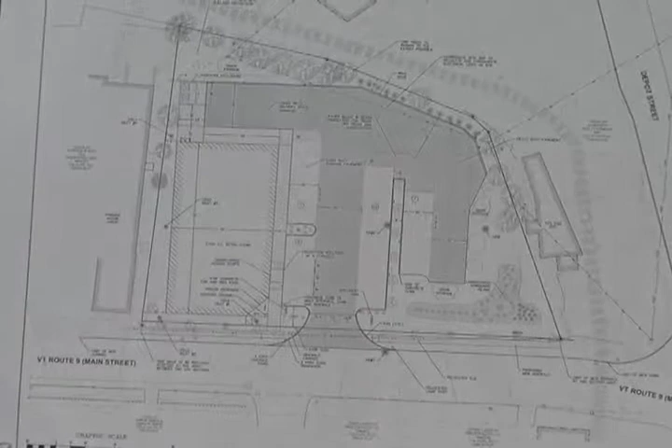Okay, I'll start with the site plan. That'll probably be the easiest to go over. What we're looking at doing is constructing the retail store on the west side, west portion of the parcel. The parcel is shown on the plans of the outline, kind of an odd square shape.

The drive that we're going to be proposing is just about opposite of the drive across on the south side of Main Street, and it would be shifting the existing drive that's there now up to the west a little bit.

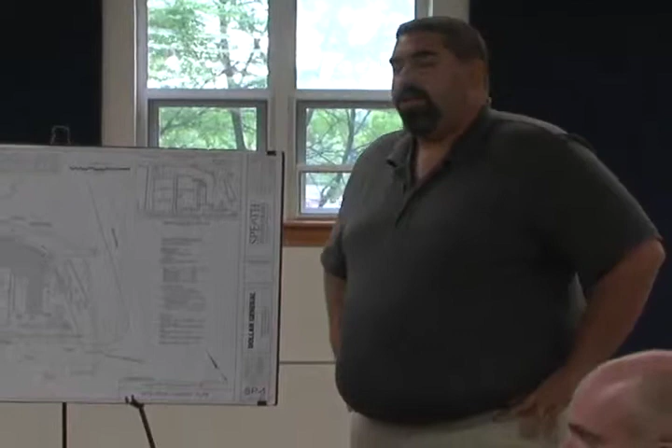The store would be 9,100 square feet, requiring 31 parking spaces by the town zoning code. So you can see we have those required spaces for the project here. It is a center drive aisle for parking on both sides, and then we have a swing around and extra parking spaces on the back side here.

The reason this layout is done is more for Dollar General's traffic circulation plan for their loading and unloading of their trucks. Their trucks would turn into the entrance, come around, and then back up to their loading zone, which is located behind the building. This way, if a truck is loading, it's out of the way of all the rest of the circulating traffic.

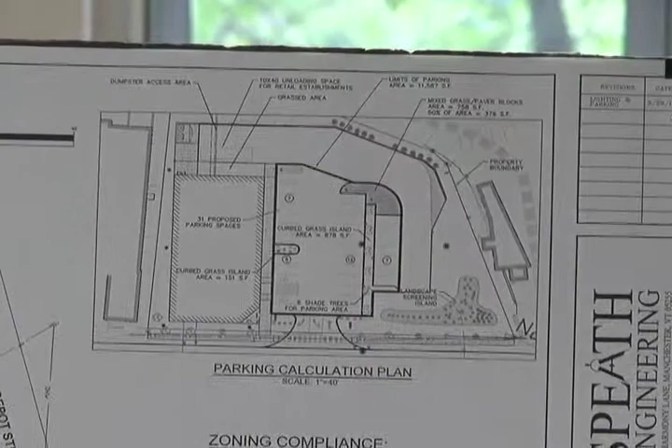As well as part of the circulation, we have provided, besides the spaces, all the necessary landscaping trees and green space within the parking area, which is shown on this calculation on the top corner. All the calculations are shown there and then below in the charts, showing that we meet the green space and parking spaces, and the amount of shade trees to be planted.

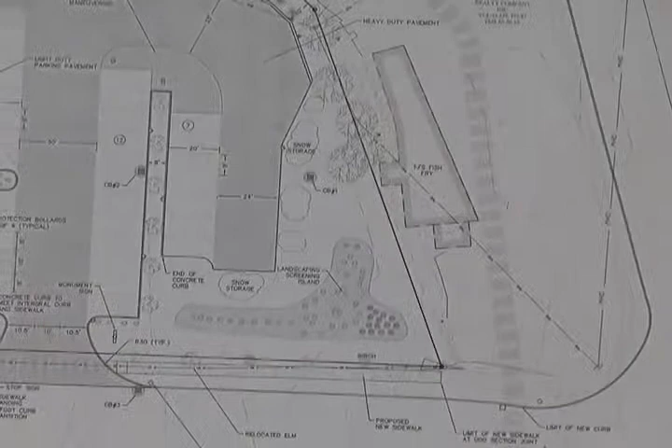As you probably know from seeing the site over the years, there's a line of hedgerow trees along the property line from the existing retail establishment where Family Dollar and the DMV are now. We will have to grade into some of that bank, and since those trees are tall deciduous trees, we're going to remove a few of them and then put in a row of evergreens to help screen the parking and meet that 42-inch parking screen that we need to meet.

In the front area, instead of just putting landscaping shrubs right up against the parking area, we want to leave some room for snow storage as shown here, and plant approximately a 2-foot high, nice landscaping berm with a lot of plantings on it to help screen the parking lot. So it would be an earthen and vegetative screen for the parking.

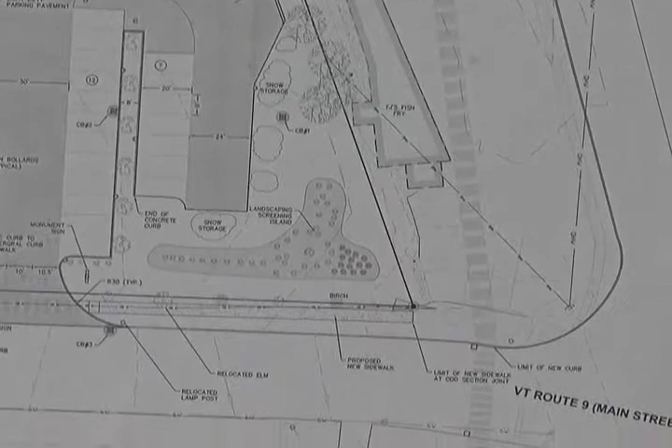The building itself is planned to be the 2-story as required. It would be a faux second story, but it would have the parapets and all the cornice details, which was approved by the historic review. What we're planning on is a brick panelized system, with windows that would actually be faux windows, spandrel glass, dark shaded, so there's no reflection on it.

We also have some other details such as the awnings over there. The front would again have some additional street trees. As you know, from that site now there are some street trees, maples and elms located on the street along with a light pole.

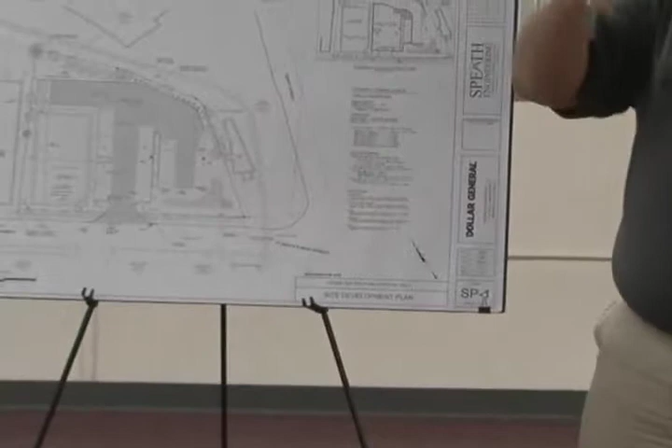One of the light poles is actually a little too close to the entrance we're proposing, so we're planning on relocating that pole approximately 9 feet. After talking with R.J. Jolly about it, he wanted to keep that light pole as close to the entrance as possible to keep the spacing on the street the same, so he's okay with this location.

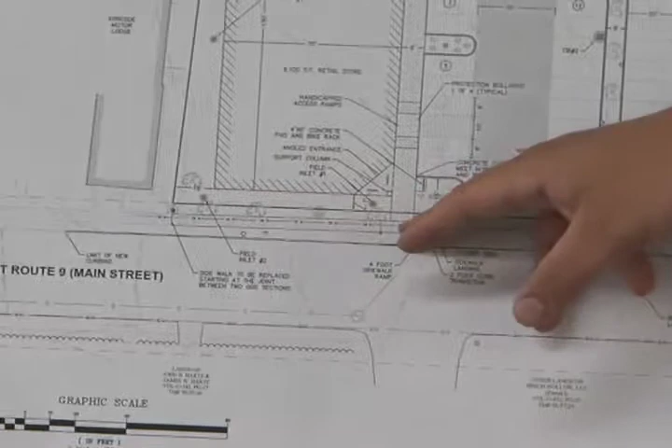We'd also be moving one of the street trees back in front of the building, and planting a few additional trees to make sure we meet the spacing requirements and that everything has a nice, evenly spaced feel about it.

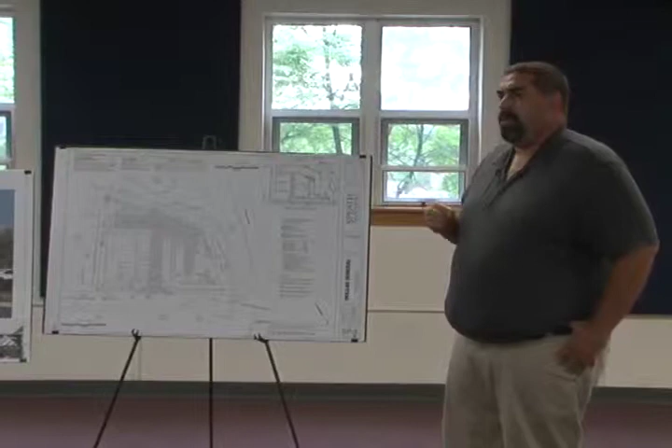On a drainage note, there's a few downspouts and some runoff coming, since we're going to be adjacent to the Kirkside Motel on the back side. You can see there's some lines sticking out, those are actually leaders coming down from the roofs. What we're planning on doing is collecting it.

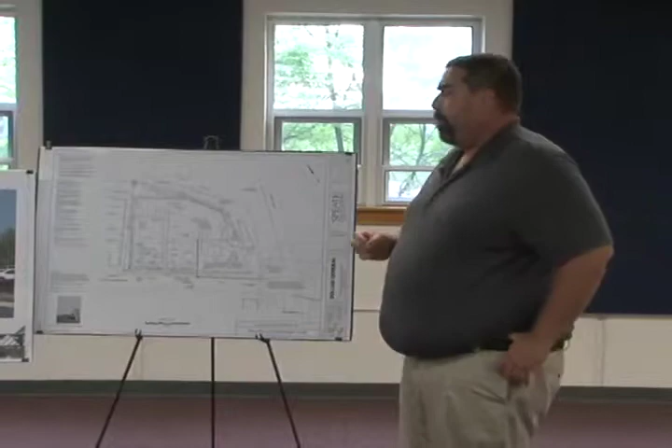One of the other plans you have is a grading and drainage plan, SP2. That shows we plan on putting some drainage inlets. Those are Nyloplast structures with a metal rim, somewhat of a catch basin, that would drain water that collects on the surface. We'd have it graded down so they'd be at low spots, and the roof drainage from our building would also drain into that system.

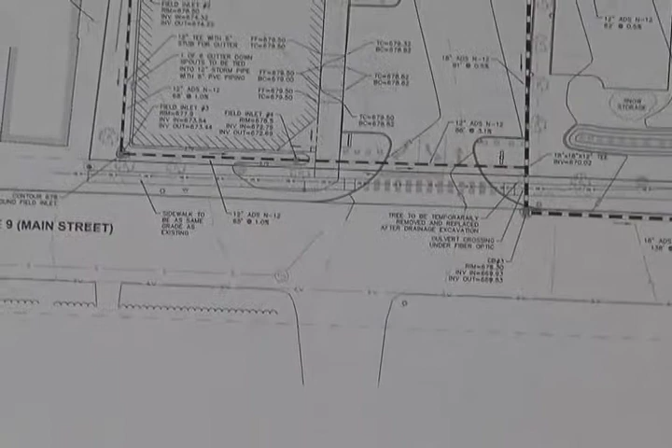We plan on collecting it, bringing it out towards the road across the front of the building, with catch basins in our parking lot and snow storage areas, bringing it out to a new catch basin on Route 9, or Main Street, excuse me. Then we plan on connecting that catch basin down to the existing catch basin located in front of the Sunnyside Diner.

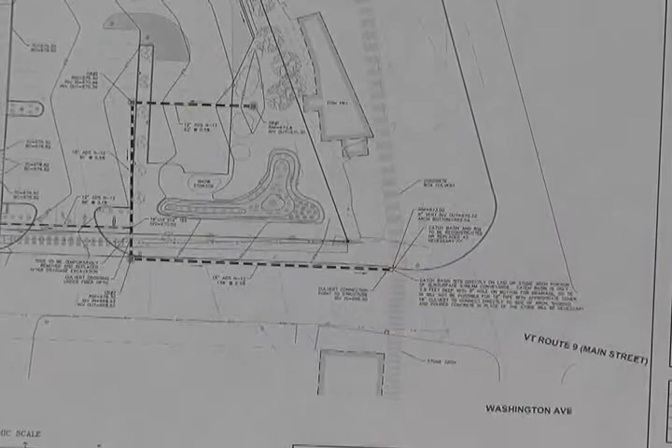One issue we'll deal with during construction is that this catch basin is only about 18 inches tall and sits directly on top of a hand-laid stone arch that still goes underneath Main Street here.

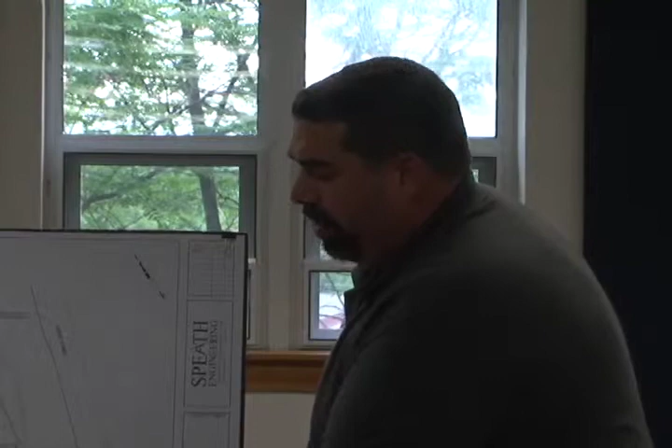There's a concrete headwall behind the Sunnyside, comes over, then there's a hand-laid stone arch here, and it goes onto this property where the fish fry is, that's now a box culvert going up and around out to the river. So we'll be cutting part of the road up and shoring up a new connection directly into the stone arch, leaving the catch basin alone. We'll be going into the side of the arch with a new concrete poured wall to shore it back up.

That's something we'll work out with RJ if we get approved and move towards construction, but he's preliminarily approved our connection to the drainage system. What he did request, since we're digging along the curb, was that we replace the curb along Main Street.

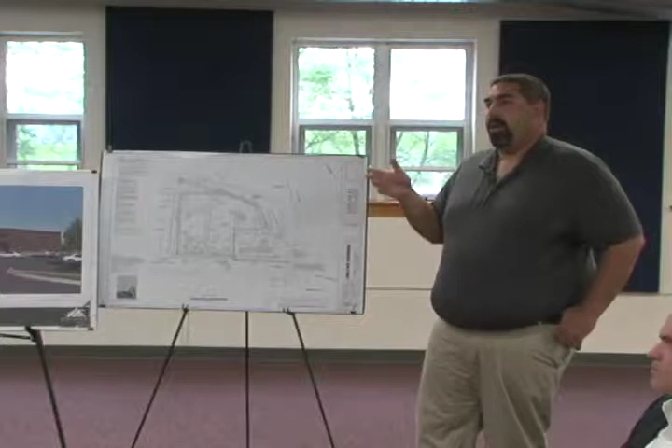What we're showing here is from about that catch basin, at a point either where there's an expansion joint or where the two curbs don't match, which is pretty much right next to the catch basin, we plan to replace the curb all the way up to where it meets the property line and just past it, to where the Kirkside Motel driveway is. Instead of stopping 20 feet short, we're going to go the whole way.

We also plan to dig up and replace the sidewalk, since we're going to be moving parts of it anyway, and replace the whole front part of the sidewalk in front of the property. This works well because when you walk on the property, there are odd sections of sidewalk in that area anyway, so we'll be taking out some of the older stuff and matching it up.

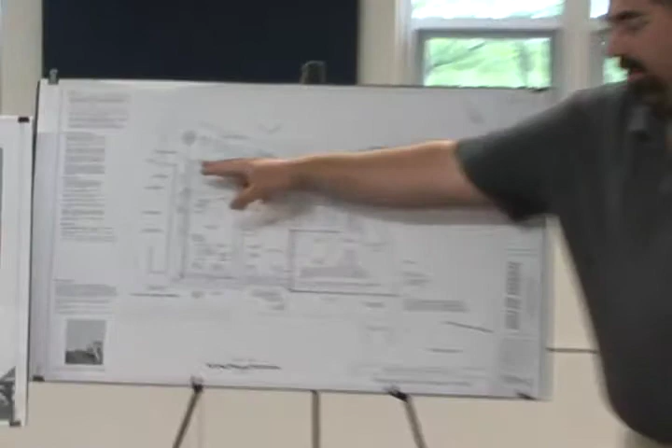Otherwise, for drainage, we'd be collecting everything on our site and bringing it to the town system, which is the box culvert that goes underneath. The grading is shown goes to all the catch basins. And on this side where it's fanning back towards the end, we'll have a wing edge on the end of the pavement, with a detail on the detail pages, that'll bring it around into this catch basin. The catch basin is sized with 18-inch pipes, which is adequate for the storms as necessary.

This project has less than 1 acre of impervious area, so it does not require a stormwater permit from the state of Vermont. So we are doing treatment and good engineering practices to manage the stormwater, so it doesn't go off to the neighboring site like it would today.

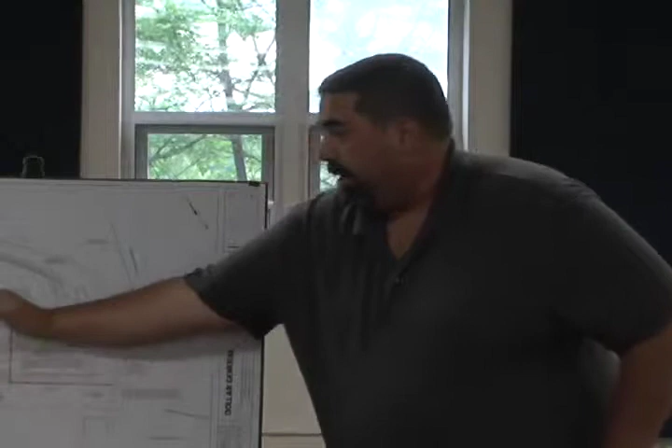Heavy storms now would actually just fan itself across the parking lot into the vegetated areas, and then down into the parking lot where Aubuchon used to be, now Family Dollar, creating more problems for them. We'll be collecting it and bringing it right to the town system, which drains to the river.

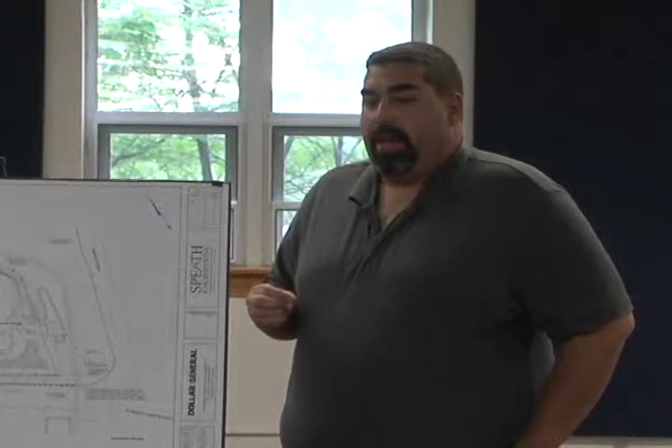We've also supplied utility plans and a landscaping plan, with foot candles analysis for the lighting plan. We've gone through multiple iterations of the lighting plan. I could put it up, but you're better off looking at it in your packages. We plan on using LED lights, multiple poles, to keep the foot candles down to meet the town standards, and also the state of Vermont standards for municipalities for dark skies.

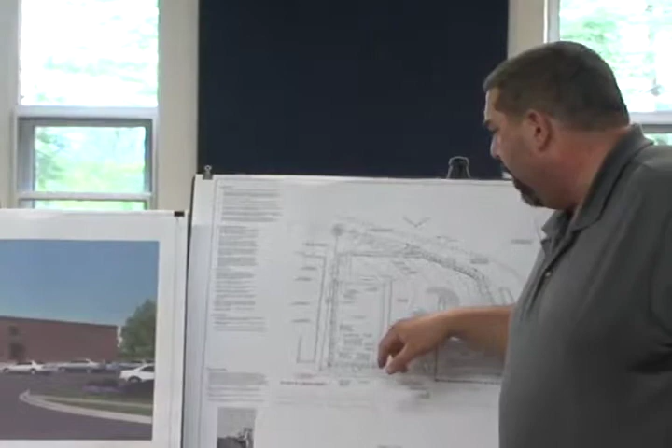We had originally designed the project to have wall packs attached to the building, but obviously you don't want to light the building up to meet town standards. So those have been removed, and now there are poles located in a couple of parking spaces and some hatched areas.

The building itself, if you don't mind, I'm going to pass these around, will start on both sides. It's brick panelized, and then this is the stone base. The stone base would be the lighter stone at the bottom of the picture, and the brick would be the rest of the building.

As requested through the historic review of the downtown district, the columns for the breaking of the building would be proud, sticking out from the building as shown in the illustration. Different architectural features were brought in to try to mimic some of the other downtown buildings, like the one near Friendly's or the theater building. There are definitely some details put in to try to match that above and below the windows, and the awnings.

The building would be supplied by propane. You can see it shown on the utility plan, SB3, but also on the grading plan. We're going to have buried propane tanks in this back area, with a slope going down to a flat area where they'd be able to have a couple of 500-gallon propane tanks buried, and bring the line in to the condensers and everything for the building.

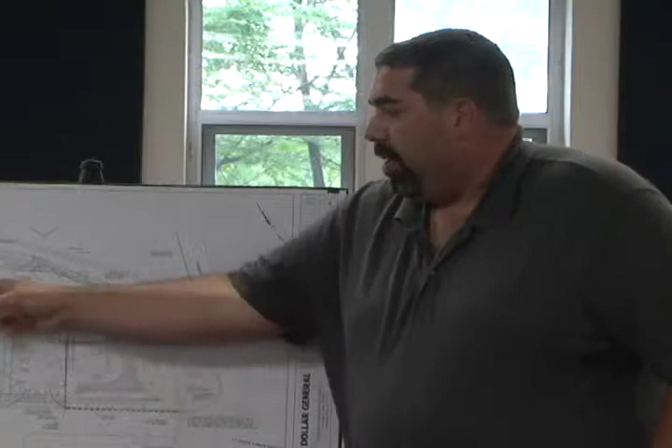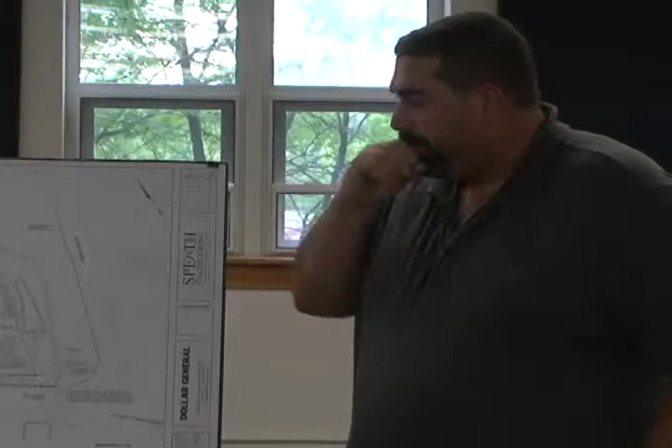We're also proposing a dumpster area located behind the building, out of sight, screened with wood fencing. It would be an enclosed dumpster area with gates and everything, so we'd be able to keep it fully enclosed.

Overall, that's a basic overview of the project. I think I've touched on a few of the elements that we've designed it for. If anyone has any questions, I'd love to answer them. Anyone have any questions? Charles?

The sidewalks, are they going to match up with the downtown, how Bennington's doing their downtown sidewalks with the brick and the light post? Is it going to be matching the same as that?

Not at this time. You mean between the brick and the curb to have brick there? Between the corner of Depot Street and Main up to the Kirkside Motor Lodge, the sidewalks. I'm trying to think of what Main Street... Oh, those are concrete walks. Okay.

So we plan to just put in the concrete and then restore the grass strip that's between the concrete that's there now. There's a telecommunication line that runs underneath the sidewalk right now, and there's a manhole down near the fish fry sign over here in the corner.

We could always work with RJ when we go through construction, since he'll be an integral part of it if we're approved. So we can make changes during or before construction as necessary, but that's what he's asked us for - the curb and sidewalk to be replaced, which we absolutely agreed to.

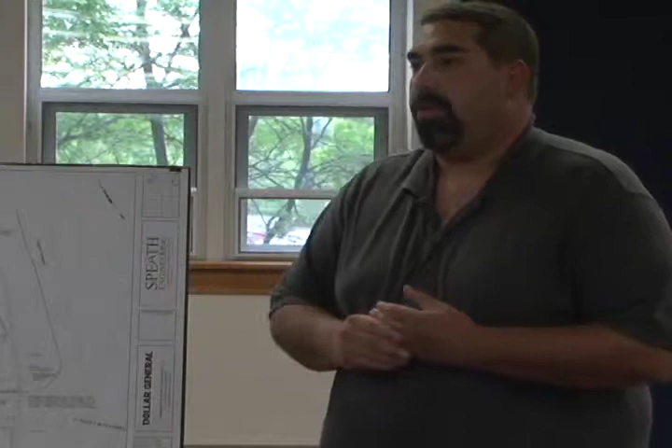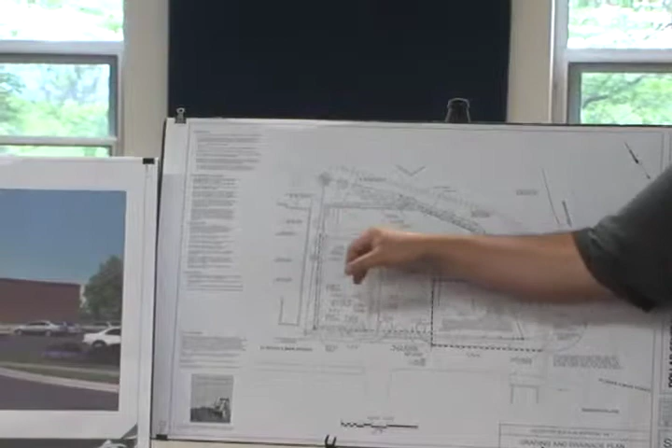Any questions? Ron asks about the upstairs second floor and what it's for. It's actually not going to be a full second story - it's a faux second floor. Behind the parapet wall is a sloped roof that goes to a leader system, and the mechanicals for the building will be hidden up there behind the parapet wall, because otherwise they'd be in the area behind the building next to the loading zone, which I'm showing as grass. Normally the mechanicals would be behind a fence, but to keep noise down toward the back of the hotel, we decided to put them on the building where the parapet wall would shield the noise.

Dan asks if there's screening on the propane tanks. The propane tanks will be below ground, so only the covers will show, and we show a few bollards just in case a car happens to go over the bank. But again, just the covers would be visible.

A question for Dan: the Norway spruce - that wasn't the planting we talked about last week that was considered invasive, right? It was not, not that I recall - that was a Norway maple of some sort, which is okay. Yes, the Norway spruce is fine.

Bill asks whether there will be more discussion on the building, since he has a couple questions about it. I can talk about the building. Why don't you wait - I have some questions on these drawings first. Okay, let's do those first. Okay, on EC1?

There's a couple things I'd like to see removed here. There's one right in front of TJ's Fish Fry - it says existing guardrail to be removed, but there is no guardrail there. There's posts and a 3-string wire guardrail that goes in and out of the ground, which we plan on removing - I think it was installed for the car lot. He's talking about the one in front, you're showing one in front of the fish fry, and you showed two there - it's just a note that's misplaced. You just need to remove that note. There's one just below that points to the guardrail, but this one just points to the building.

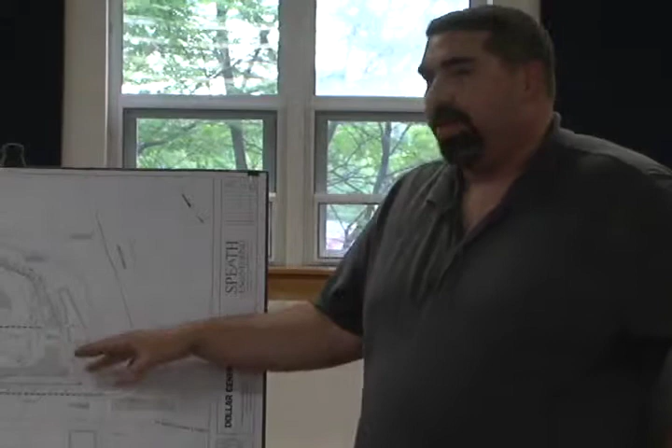The other thing I was a little concerned about was the snow storage area that faces Route 9. I understand why it's there and don't have any problem using it - my only concern is leaving the snow there for prolonged periods, since it turns brown and dirty. You're talking about the one behind the berm, right? That's one reason we proposed the earthen berm to be a couple feet plus a couple feet of shrubs - though the shrubs might not all be evergreen, so you'd still see it. Without putting snow storage in a place where it would drain to the neighbor, it's hard to find another area, so we'd keep it back in this general area. I don't have a problem putting it there, but I think we'll add a stipulation that it has to be removed periodically, or broken down and spread, just so there isn't a big pile of black dirt building up there every time it rains or the sun comes out. I get it - that's okay.

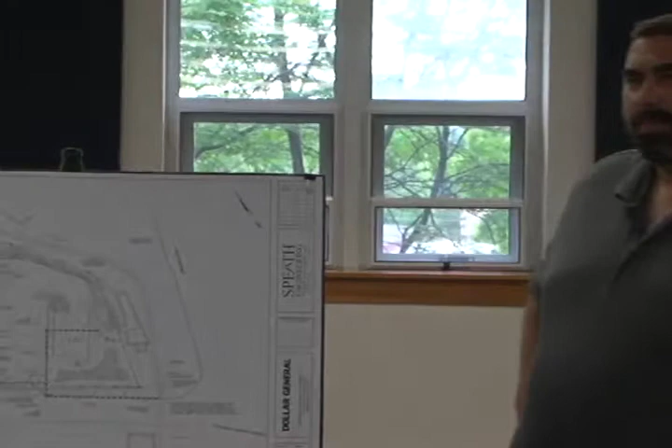Anyone else on that drawing? Okay, I have a couple of things on this one, on the elevation drawing of the building. One thing is I need a graphic scale on that drawing.

Oh, the elevation drawing? Okay, that's not a problem, I'd like to see a graphic scale. And also, Bill mentioned that the east should be north, and I think the west should be south. Right, I'll work that out. Those are actually done by the architect who did the 3D rendering as well, and I'll work those items out with him.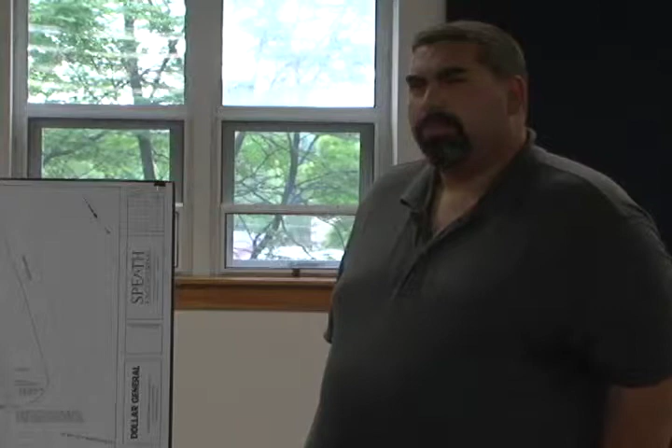And the other thing, when you get a sign permit, the size of the sign is the whole enclosure, not just the letters, so that has to be changed. It comes to about 40 square feet.

So just for your edification, you will need to get a sign permit, and that 40 square feet is over the maximum, so we'd have to shrink them just a little bit. I think it's 36 overall for the two signs combined. We can work that out, but...

Right, and I know it says put the imaginary box around it and do it, so again, I'll work with the architect to do that, and we would obviously do that for the sign permit. Just for you, so moving forward, so you know. Absolutely. Any other questions? Sam, you have anything?

Yes, I do. Would you come up, please, sign in, give your name?

I'm Sam Rustino from Bennington, Vermont. I work at Kirkside, and also I'm part of taking care of the El Carroll property. And I've got some questions for the project. I think it's great, I hope the project does go through.

Will you be allowing any parking in front of the Dollar General on Main Street? He's going to have adequate parking. No, on Main Street. I don't know, can't stop it. I don't know if there's a no parking zone or not. It'll just follow whatever the existing rules are.

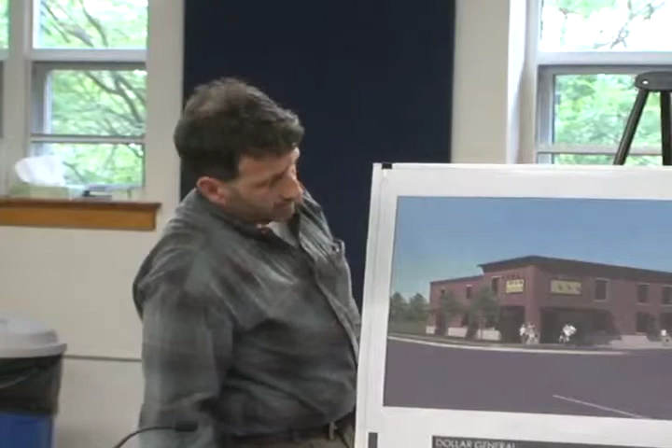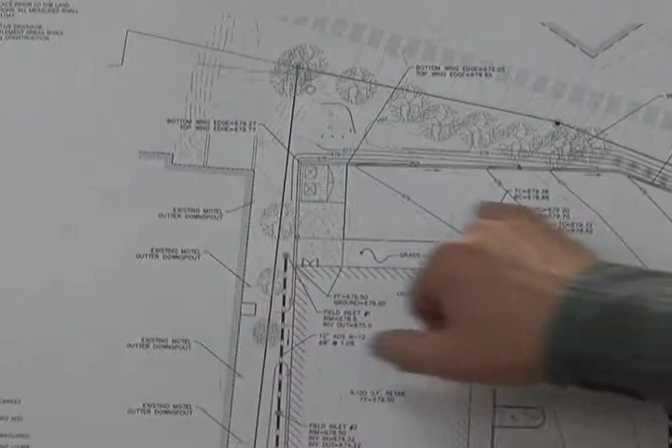Okay, two ways to solve this. It doesn't get filled all that much, you could have the delivery truck park here with its 4 ways and pull the hose from the front of Kirkside all the way to fill this tank, or get permission on your property to allow the driver to come over and park here. And is this going to be a fenced-in area, or an open area here, to allow access to fill that propane tank?

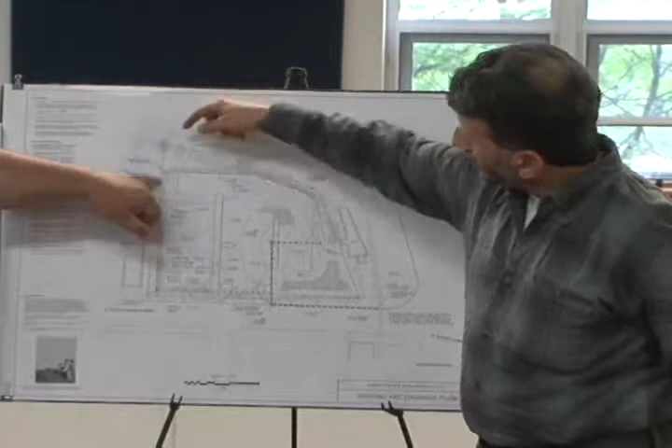Right, if I recall, there's actually access and a gate here, which a truck could back up to and fill as well, on the Kirkside property, there's a gate on the parking lot there. Correct, but the elevation is down lower, and you're up on a hill, it'd be difficult for the driver to come over, so this is something to be discussed.

Yeah, I don't know if they would allow, my client would allow that just for safety. I don't think it's appropriate for us to mandate easements for private property owners. The board can certainly consider it, but I don't see it's a concern that was overlooked. I mean, you're building great with the project coming in, it's been vacant for 7 years.

I'm just bringing concerns to the table as well. And drainage is another issue. As you know, this property was once a holding pond that ran through Bennington many moons ago with water. Yep, you're putting a property on water.

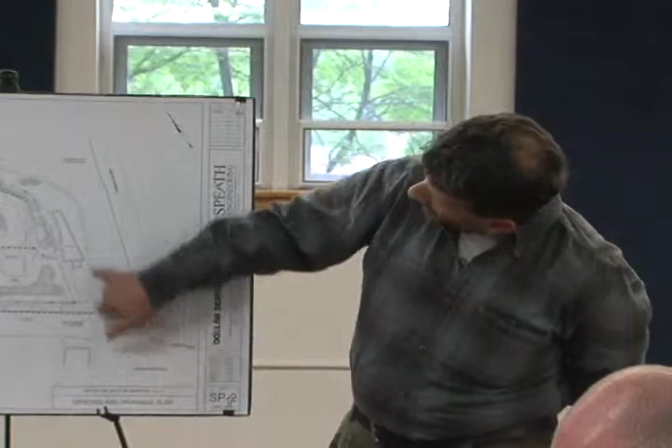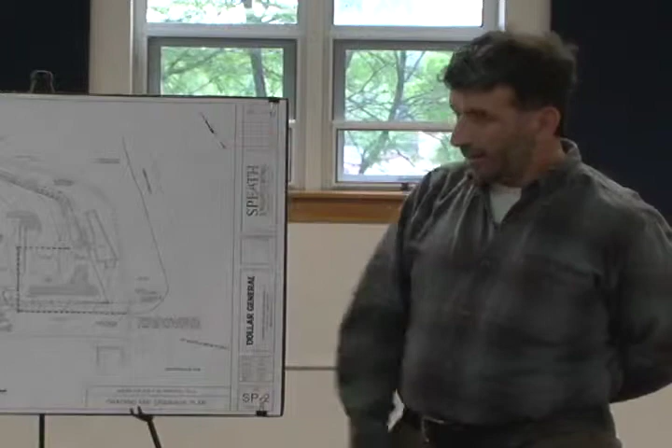It's not a concern? Let me ask you a question. Are you connected to the Kirkside? Yes, I work for Bill Soto with the Kirkside, and also I'm caretaker of the El Carro property. I'm caught in the middle, and this is why I came to this meeting, to voice my opinion. And I look at this property every day. And with this catch basin that I'm surprised has not collapsed yet, you're allowing to put more water to travel through.

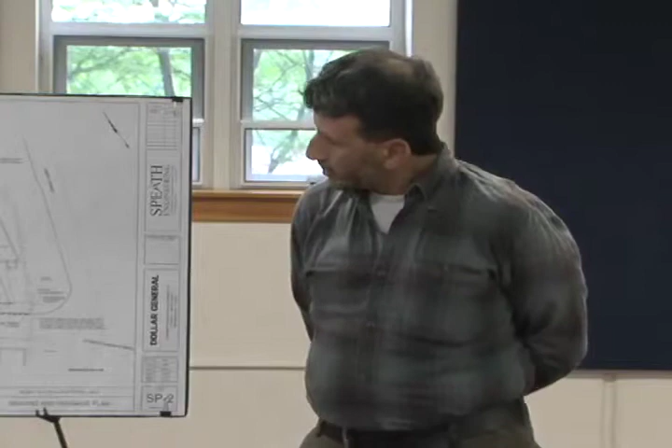Yes, when the time comes, if we cross that bridge to address this issue, we don't know how this is going to work. We know how it works on paper, but in reality it's something to think about. I'm all for the project, there's just questions that I'm asking. Those were my concerns: the propane tank, the parking in front, and drainage.

Thank you, Sam. Thank you, Sam. Anyone else? Okay, would you like to speak? Okay, Matt, is it?

Yes, Matt Casey. My name is Matt Casey. We are the developer for Dollar General on this property. Could you just sign the... Sure. If we have approval, yeah. Okay.

The only thing I'd like to address is the question regarding propane, whether or not Dollar General would allow a propane truck to service another neighboring property from their parking lot. I can probably answer that for Dollar General, our client on this: I cannot see them allowing that, really just out of liability purposes, in case anything were to happen on the neighboring property that truck was servicing from there. So it's just from a liability perspective, it wouldn't be from anything else. I think we understand that.

Okay, thank you. Anything else? Yes, Bill, I just got a question about the stone laid up. How big is that across? The dimensions of it—it's tough to measure because there's only like a toilet bowl size hole at the top of it, and we didn't gear up and walk all the way down it. It appeared to be 8 feet tall to the water from the measurement, and then it's about 10 to 12 feet wide at the base. So it's approximately the same measurement as the inlet.

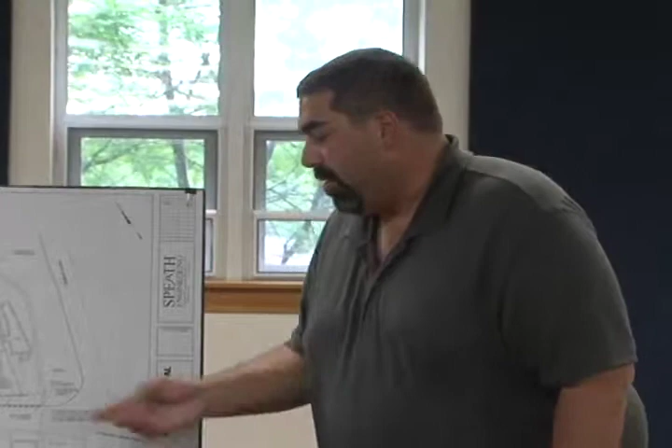No, we'll probably walk down through the other side from the end of it. The town has an easement for the right of that there, so I'll probably try to make arrangements with RJ and actually walk down it with a few flashlights, cameras, and some measurement tools and see what we can do. There's a few options that have bounced back and forth, and this is something that we can work out with RJ as part of the town, for the connection to that arch.

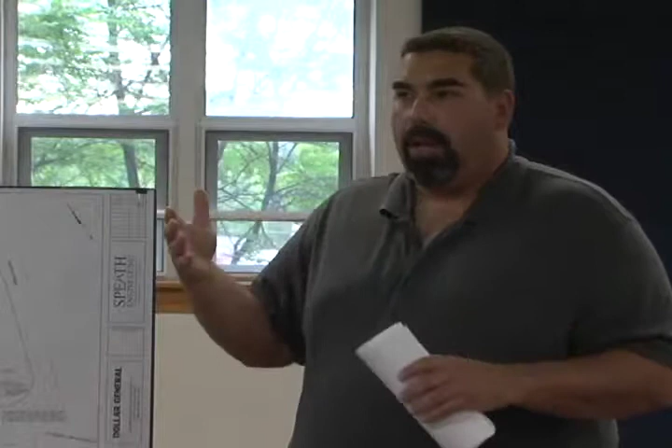But he's willing to go through that process with us and figure out how we can do it. He suggested a couple different things, like part of a box culvert section, or if we do the connection and pour a wall up to it, the town might put it on the town's plan to replace the rest of the box culvert or the laid up arch on his maintenance and replacement plan. So there's a few items that we talked about, and that's something we'll work through.

So you are going to address it? We're going to do something, obviously. It has to be safe. We don't want a catch basin to drop down in the middle of the street, because we'd be responsible for the construction. And RJ, I don't believe he does the construction, but Billy would be there watching it to make sure it's done right.

Anything else from the board?

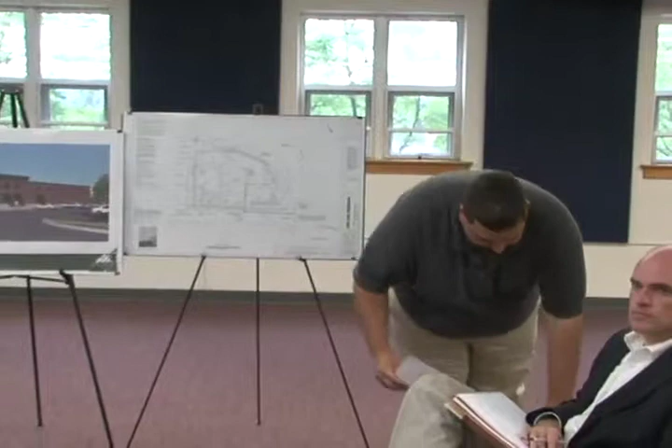If everyone's satisfied with the testimony this evening, it'd be appropriate to make a motion regarding preliminary determinations. I'll move to preliminarily approve the project. Okay, second? Any discussion? All in favor?

Are you going to have a list of things? I would like to add something to the list. I would like to see some kind of a schematic or a plan of your light poles. Oh, I submitted those - we've got the parts in here, but I'd like to see the whole thing assembled. What you have is the base and the fixture, but what Barry's talking about is, is there an arm that hangs out, or how is that all going to look - the final configuration that they'll be put on.

So a concrete base, you mean with the pole? Those fixtures actually mount right to the pole, so there's no real arm that goes out. That's not a problem, absolutely. You can include the height. And we're under the 16 foot, but that's something I'll get from the manufacturer and get to you.

So next time, just those minor things - if you could get them to me a week before the meeting, I'll make sure to get it to the board. And we can talk about the specifics. Would we be put on the next meeting? The next meeting would be July 2nd, is that the first Tuesday in July?